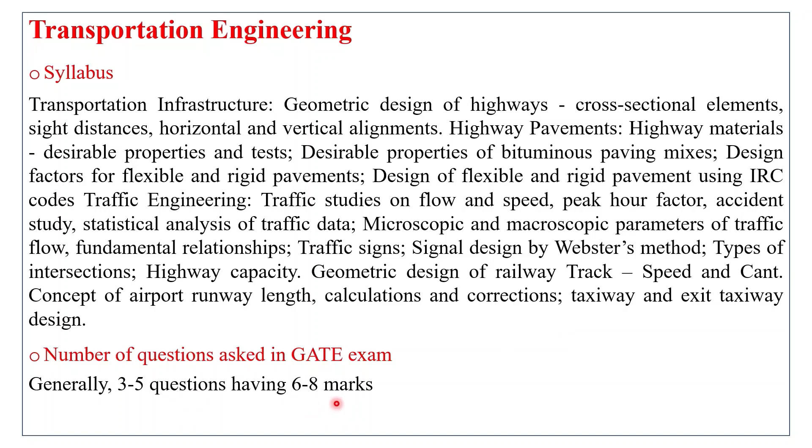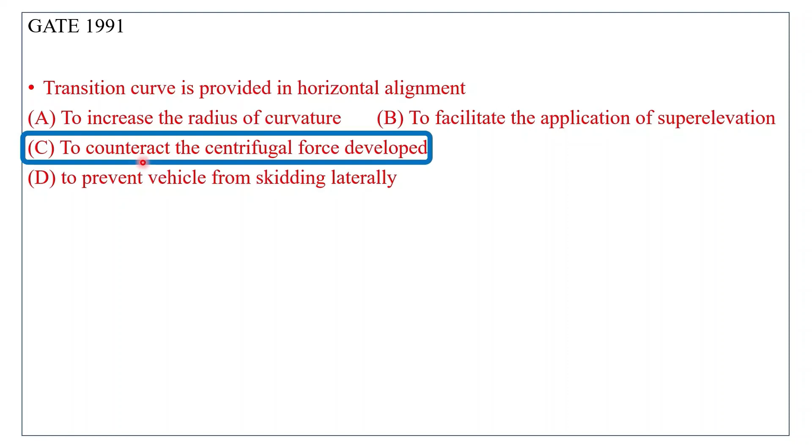चलिए फर्स्ट क्वेश्चन देखते हैं। ट्रांजिशन कर्व इज प्रोवाइडेड इन हॉरिजॉन्टल अलाइनमेंट। आंसर इज टू काउंटरैक्ट द सेंट्रीफ्यूगल फोर्स डेवलप्ड। जो ट्रांजिशन कर्व प्रोवाइड किए जाते हैं किसी भी हॉरिजॉन्टल कर्व के लिए वो सेंट्रीफ्यूगल फोर्स को काउंटरैक्ट करने के लिए प्रोवाइड करते हैं।

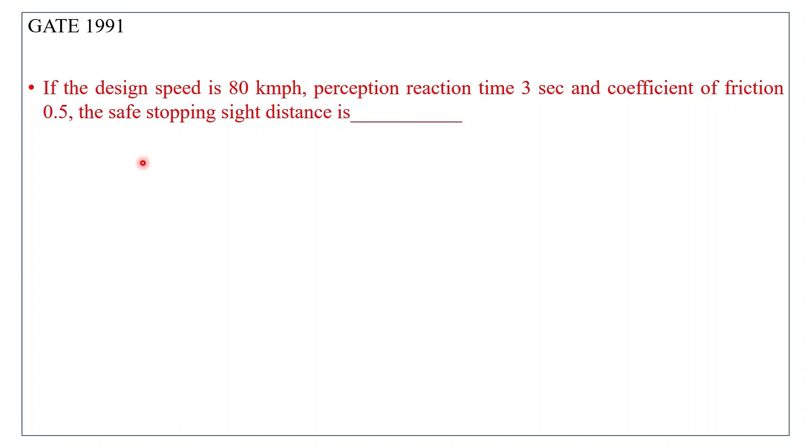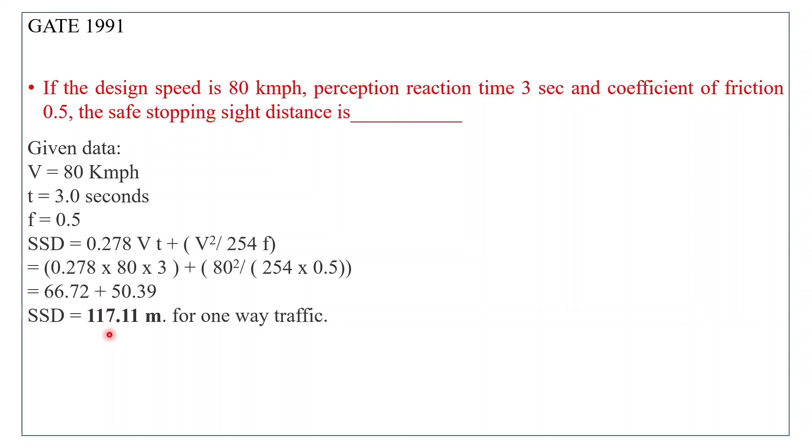नेक्स्ट, इफ द डिजाइन स्पीड ऑफ 80 kmph, परसेप्शन रिएक्शन टाइम 3 seconds एंड कोएफिशिएंट ऑफ फ्रिक्शन इज 0.5, देन सेफ स्टॉपिंग साइट डिस्टेंस इज। स्टॉपिंग साइट डिस्टेंस इज we know 0.278 v into t plus v square by 254 f. So v is given, that is 80 kmph, t is given 3 seconds, f is given 0.5. So when you put all these you will get 117.11 meter for one way traffic.

Next, given the sight distance as 120 meter, the height of the driver's eye as 1.5 meter, the height of the obstacle as 15 cm and the grade difference of the intersecting gradients as 0.09, the required length of the summit parabolic curve is. So we have to calculate the length of the parabolic curve. Every details has been given.

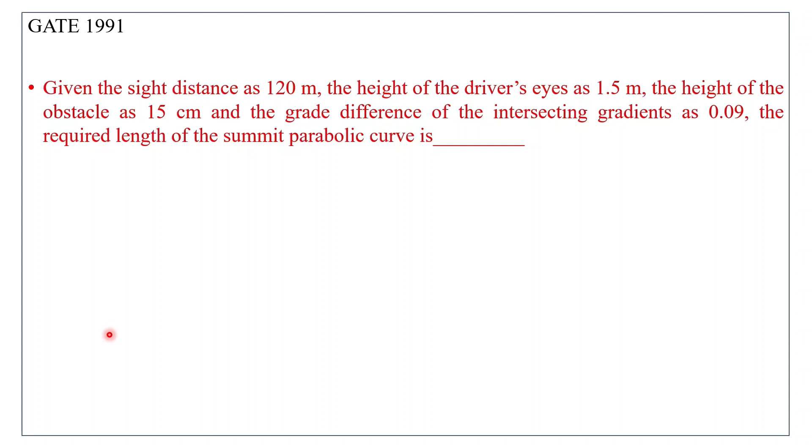So let us consider the length of the summit curve is greater than stopping sight distance. For if this length of summit curve is greater than stopping sight distance, then we have formula for the length of the parabolic curve is ns square by under root 2H plus under root 2h whole square equal to. So n is given is 0.09 into stopping sight distance given 120 meter divided by under root 2 into h. This h is the height of the driver's eye, that is 1.5, and the small h is the height of the obstacle, that is 0.15 meter when you convert it to meter. So it will be 249.36 meters. So it is more than SSD, that is 120 meter. So this is what we have assumed, the length of summit curve is greater than the stopping sight distance. So our assumption is correct. Hence the length of summit curve is 249.36 meter.

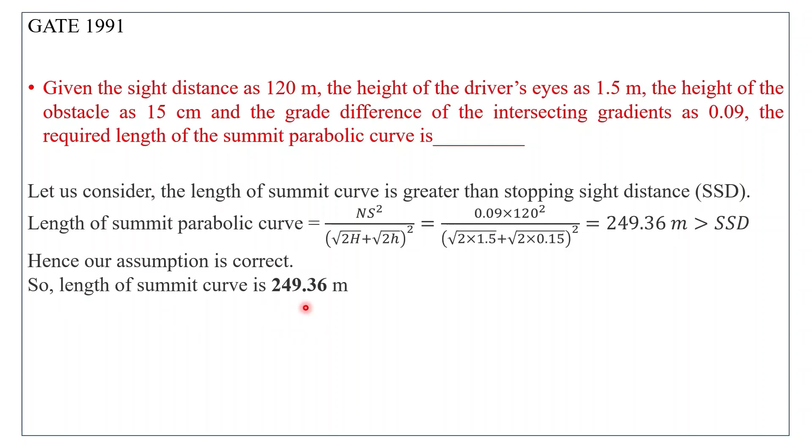Next, moving car observer method is a procedure. So moving car observer method is a procedure to find the traffic flow of traffic stream.

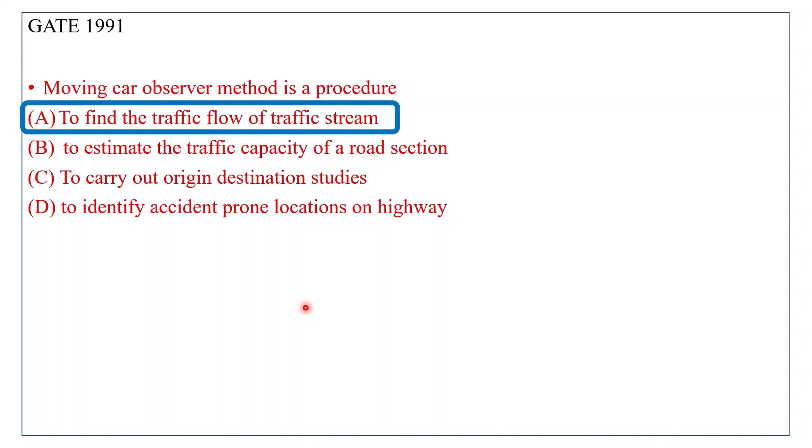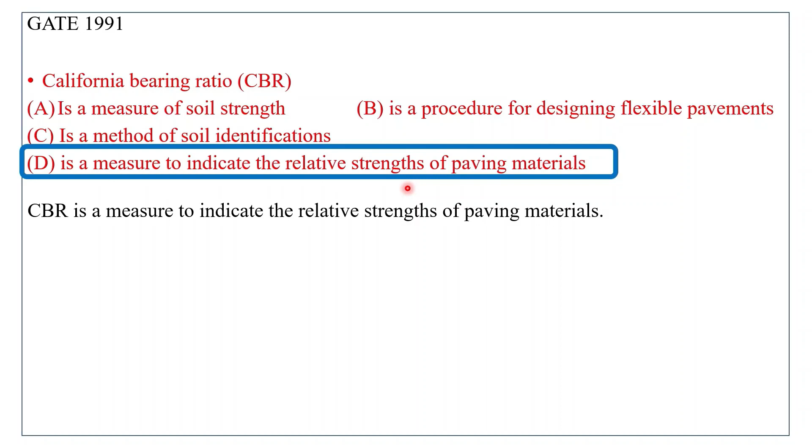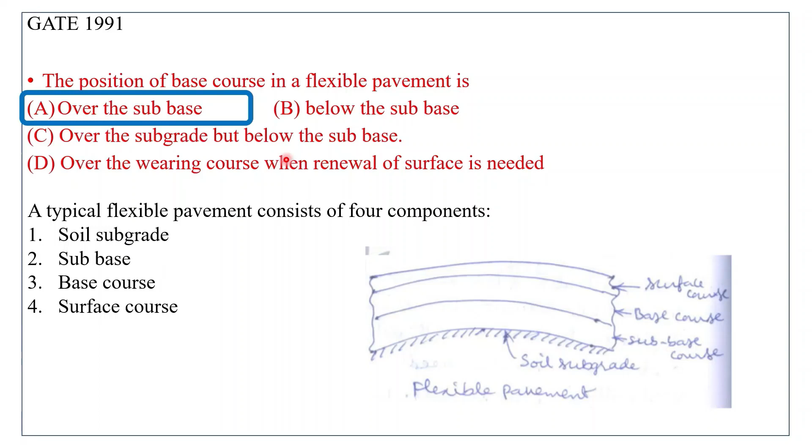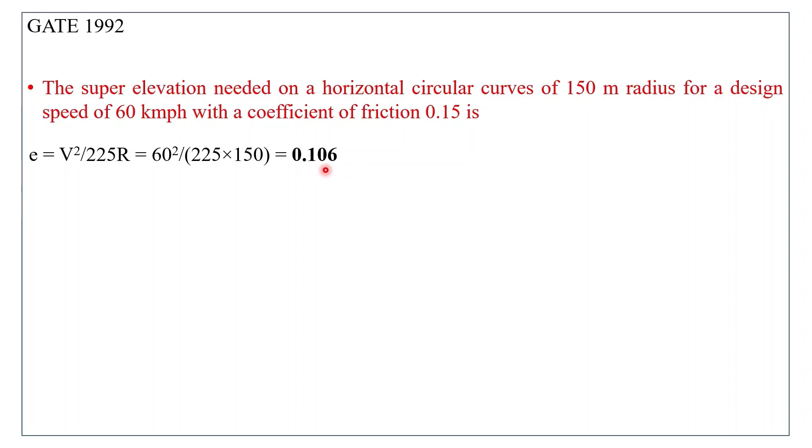Next, the super elevation needed on a horizontal circular curve of 150 meter radius for a design speed of 60 kmph with a coefficient of friction 0.15 is. So you can see that thing is required, that is super elevation needed. See this term, this needed term is very important. So that is E equal to V square by 225 R, we can say that this is the formula. So that is 60 square, V is the 60 kmph square divided by 225 into 150 is the radius. So it will be 0.106 is the answer.

Next, the important factor considered in the design of summit curves on highway is, so it is the sight distance. So in the design of summit curve, sight distance is the important factor.

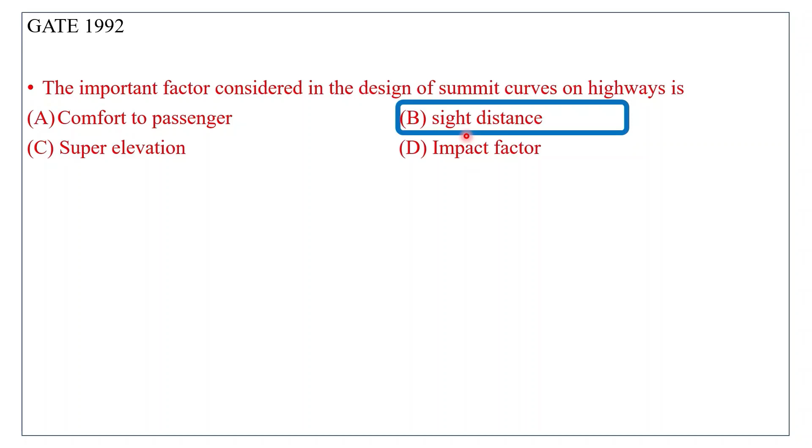Next, desired lines are drawn based on, so it is based on traffic volume studies.

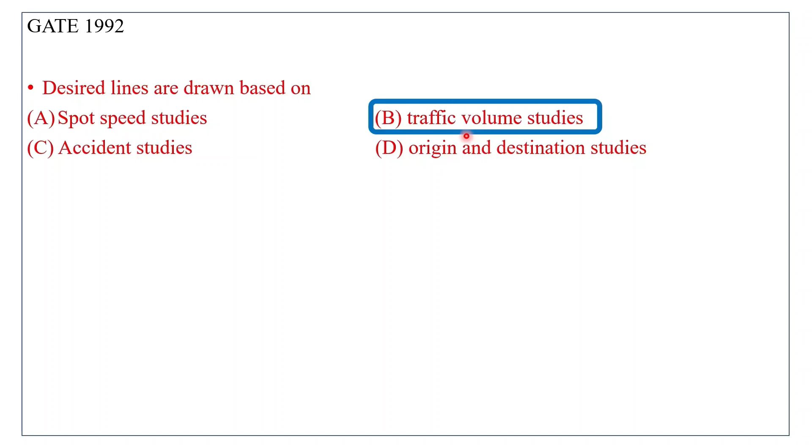Next, the PCU value for the car on an urban road is, so this value will be 1.

Next, the temperature to be maintained for the determination of penetration value of bitumen is 25 degrees Celsius.

Next, the modulus of subgrade reaction is evaluated from the plate bearing test.

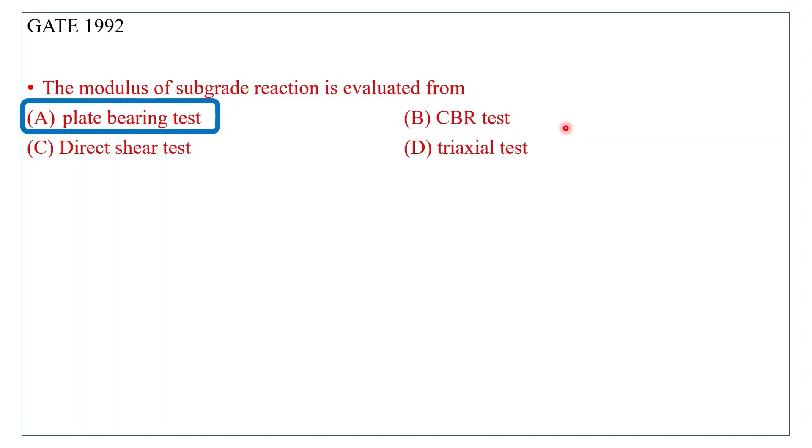Next, the load transfer to lower layers in flexible pavement is by grain to grain contact.

Next, for laying bitumen carpet over waterbound macadam road surface, one has to apply a tack coat.

Next, in a cement concrete pavement, dowel bars are used in expansion joints.

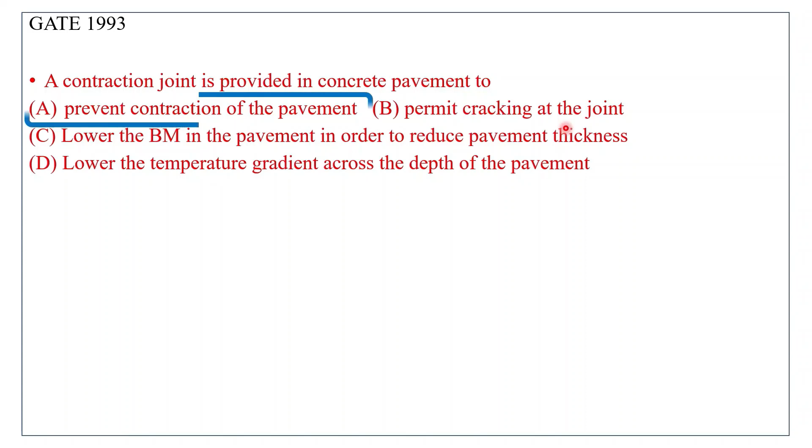Next, a contraction joint is provided in concrete pavement to prevent contraction of the pavement.

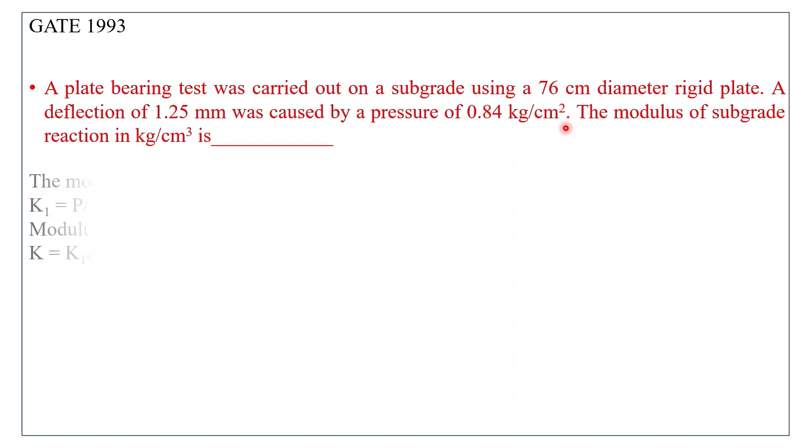Next, a plate bearing test was carried out on a subgrade using a 76 cm diameter rigid plate. A deflection of 1.25 mm was caused by a pressure of 0.84 kg per centimeter square. The modulus of subgrade reaction in kg per centimeter cube: we know K1 equals P by delta. P is the given pressure, 0.84, divided by delta, given as 1.25 mm. So K1 equals 6.72 kg per centimeter cube for the 76 centimeter diameter rigid plate. Now, what will the modulus of subgrade reaction be for the standard plate of 75 centimeters? Since you've calculated this value for 76 centimeters, using interpolation you can calculate it for 75 centimeters. So K equals K1 times A1, that is 6.72 into 76 by 75, giving you for the radius of 75 centimeters a value of 6.81 kg per centimeter cube.

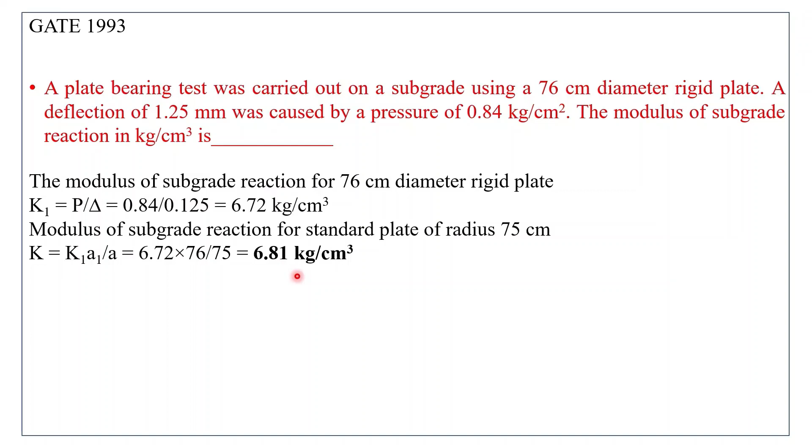Next, a road is passing through a hilly area with a horizontal curve. If the super elevation provided is 1 in 10 and the coefficient of lateral friction is 0.16, find the minimum radius of the horizontal curve which vehicles can negotiate safely at a speed of 40 kmph in meters. So E is given as super elevation 1 in 10, that is 0.1, F is given 0.16, V is 40 kmph. We know the super elevation formula: E plus F equals V square by 127 R. Using this equation we calculate R, so R equals 48.45 meters.

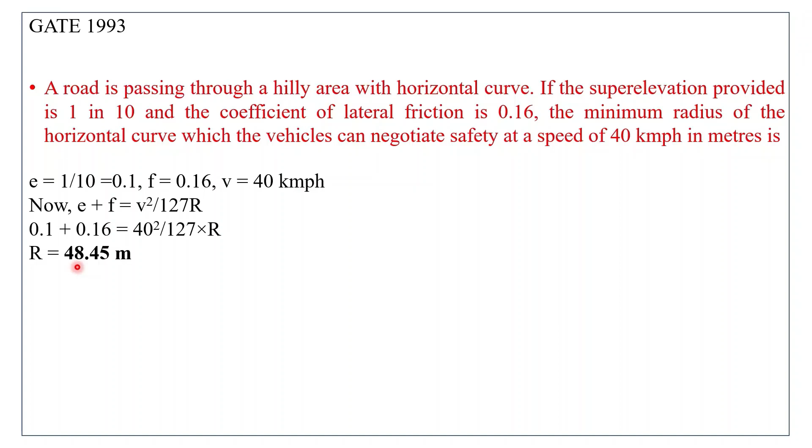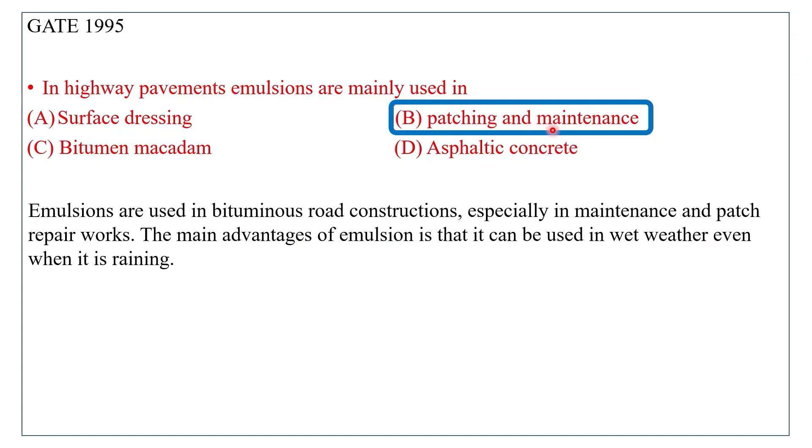Next, in highway pavements, emulsions are mainly used in patching and maintenance work. For patching and maintenance work, we use emulsions in bitumen road construction. The main advantage of emulsion is that it can be used in wet weather also, even when it is raining, in the maintenance of bituminous roads.

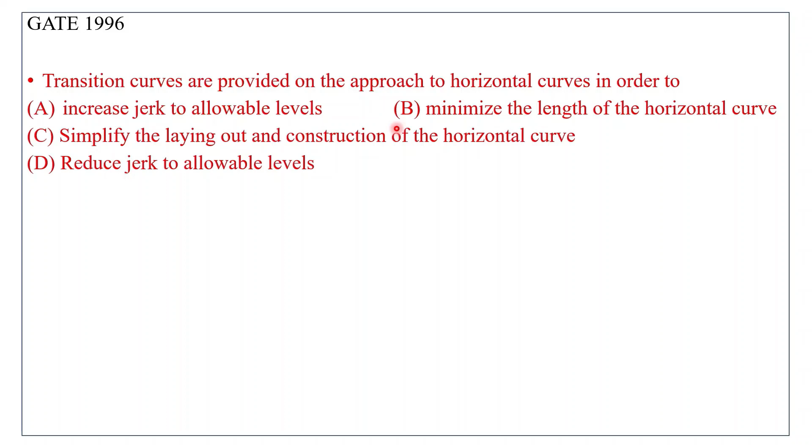Next, transition curves are provided on the approach to horizontal curves in order to reduce jerk to allowable levels.

Next, flexible pavements derive stability primarily from aggregate interlock, particle friction and cohesion.

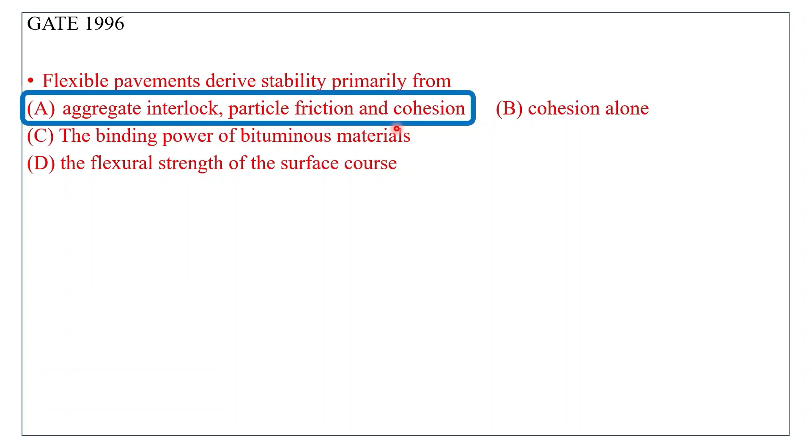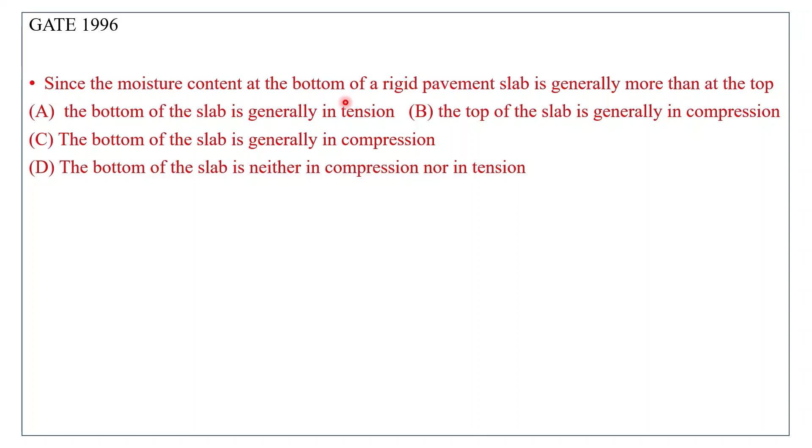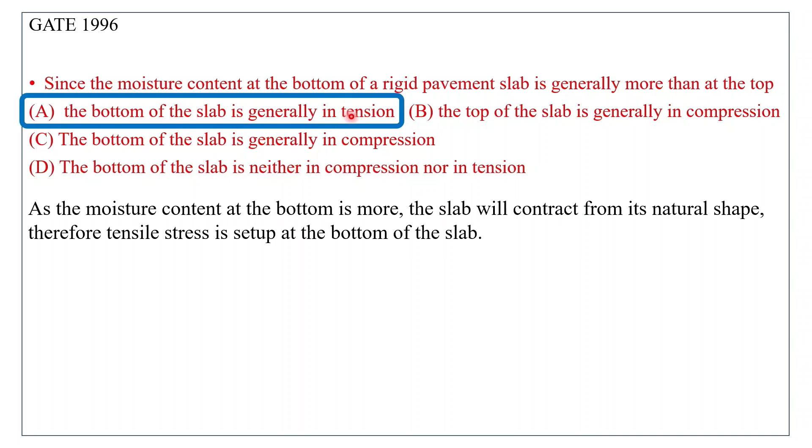Next, since the moisture content at the bottom of the rigid pavement slab is generally more than at the top, which condition will occur? The bottom of the slab is generally in tension.

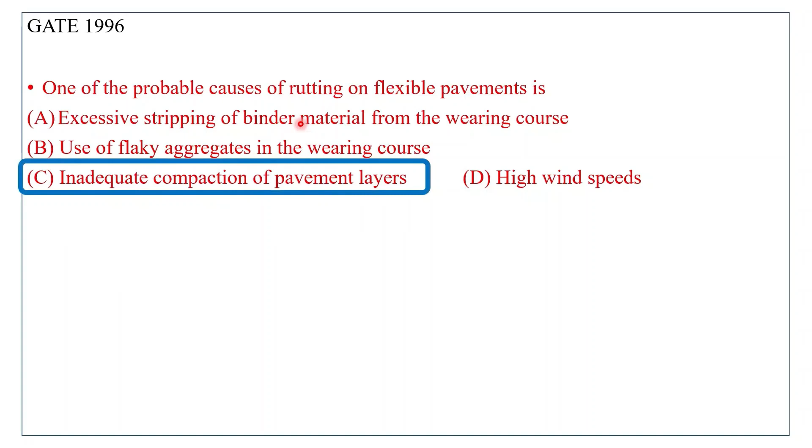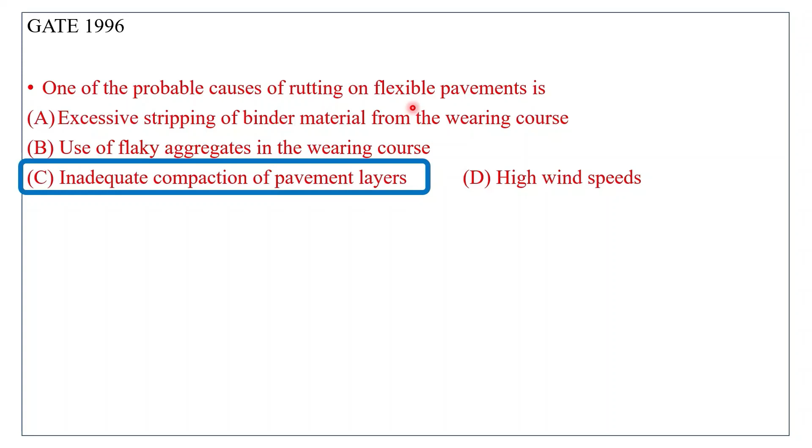Next, one of the probable causes of rutting on flexible pavement is inadequate compaction of the pavement layer. If there is less compaction of the pavement layer, it causes rutting on flexible pavement. Next, the following general statements may be made about the penetration value and softening point of bitumen.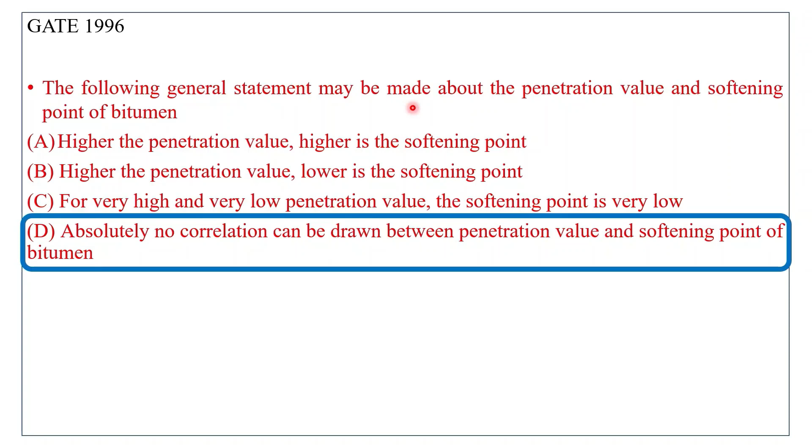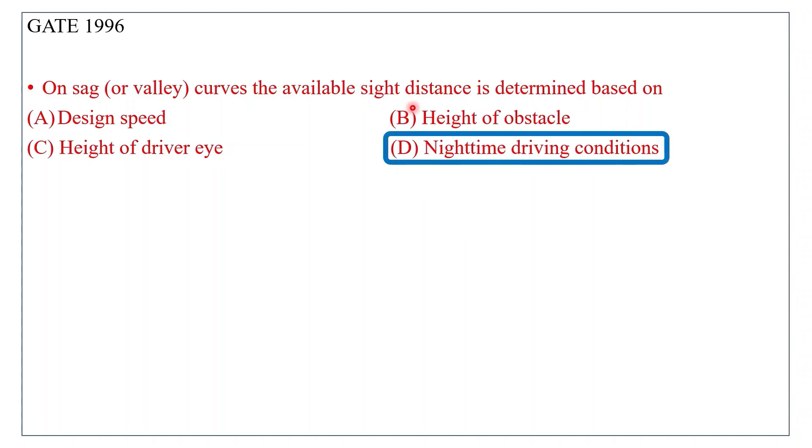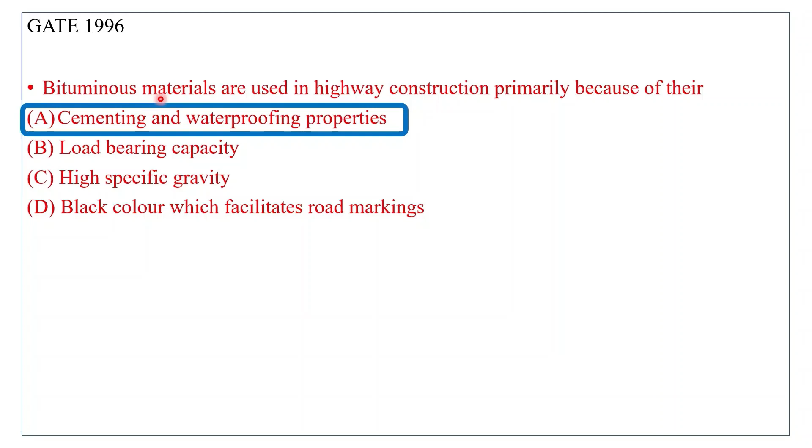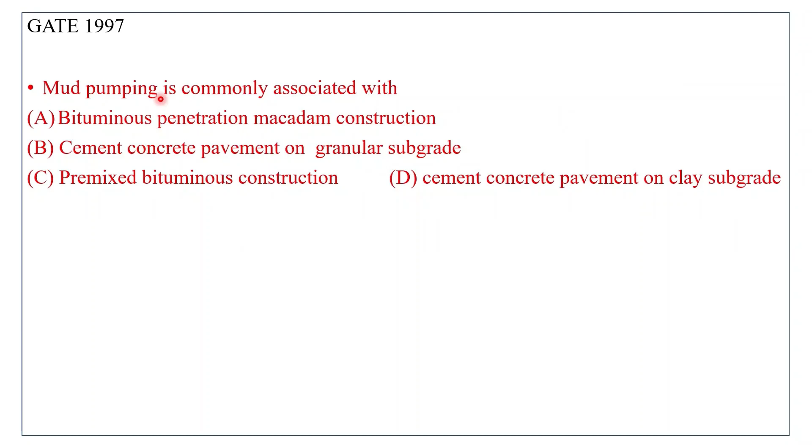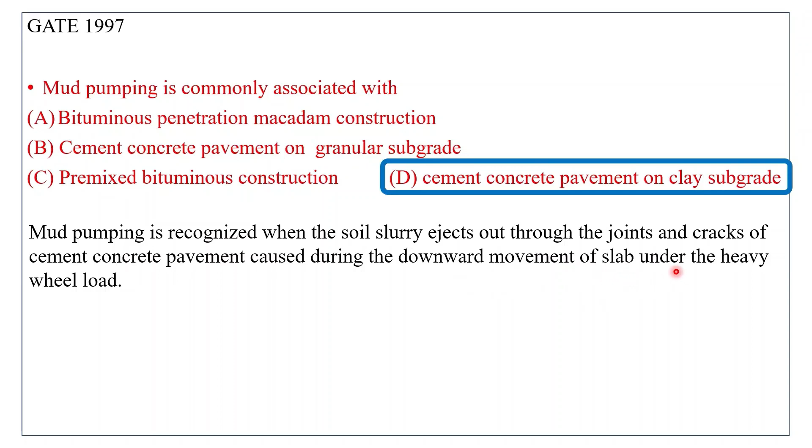Mud pumping is commonly associated with cement concrete pavement on clay subgrade. Mud pumping is recognized when soil slurry ejects out through the joints and cracks of cement concrete pavement, caused by the downward movement of the slab under heavy wheel load.

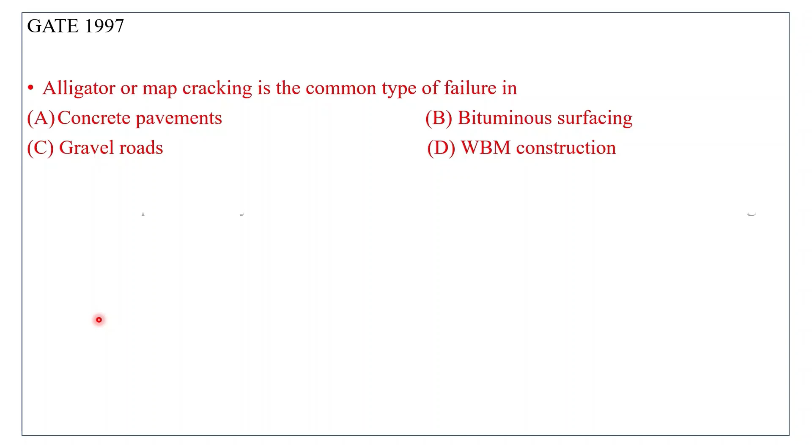Alligator or map cracking is a common type of failure in which type of road? The answer is bituminous surfacing. This is the most common failure in bituminous surfacing.

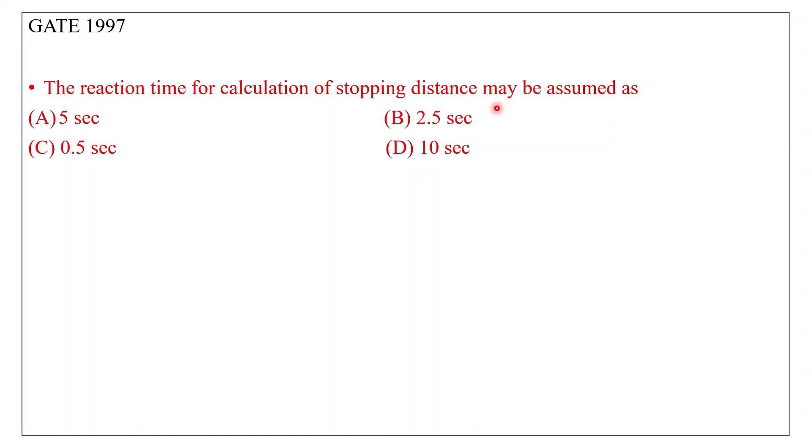The reaction time for calculation of stopping distance may be assumed as 2.5 seconds.

The superelevation needed for a vehicle traveling at 60 kmph on a curve of radius 128 meters, with a coefficient of friction of 0.15, is calculated using E plus F equals V square by 127 R. F is 0.15, V is 60, and R is 128. So E equals 0.071. The answer is 0.071.

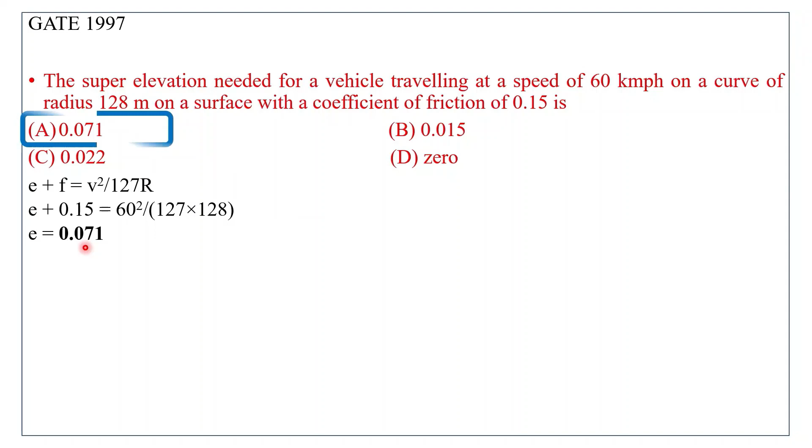If an ascending gradient of 1 in 50 meets another ascending gradient of 1 in 30, the deviation angle is calculated as 1/n equals 1/50 minus 1/30, since both are ascending gradients, both signs are plus. So 1/50 minus 1/30 equals 1/75. The correct answer is B, 1/75.

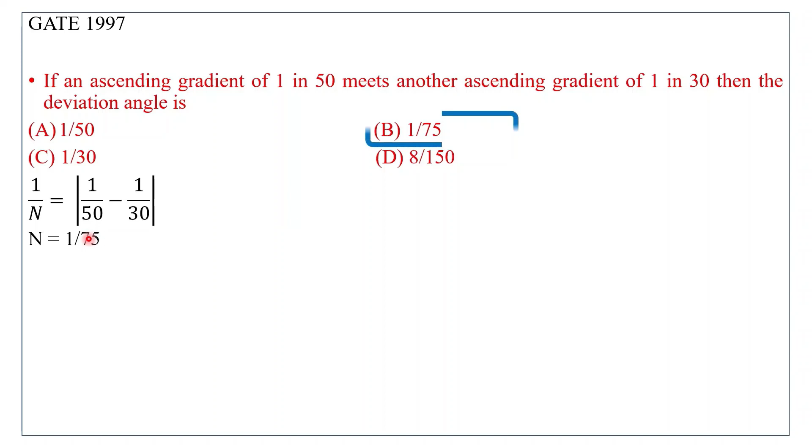The penetration test for bitumen is conducted at a temperature of 25 degrees centigrade. This test measures the hardness or softness of bitumen by measuring the depth of penetration of a standard loaded needle in 5 seconds while maintaining the bitumen sample temperature at 25 degrees Celsius. The correct option is C, 25 degrees Celsius.

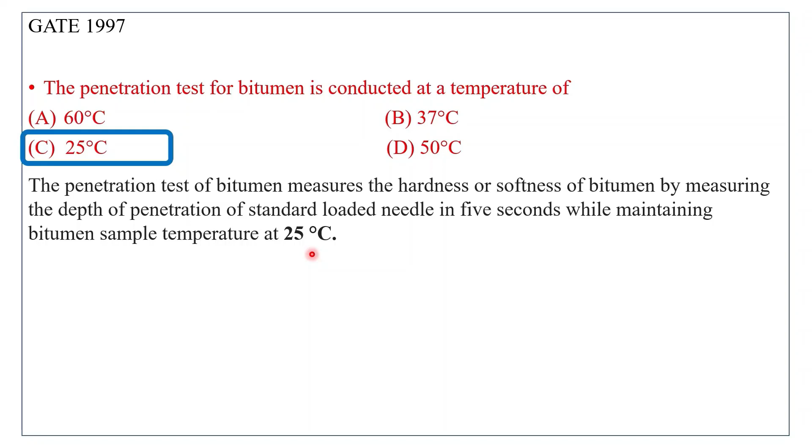The group index of soil subgrade is 7. The subgrade soil is rated based on: 0 to 1 is good, 2 to 4 is fair, 5 to 9 is poor, and 10 to 20 is very poor. So 7 falls in the poor category. The answer is A, poor.

The unit of coefficient of subgrade modulus is kilonewton per meter cube.

The total thickness of pavement by the CBR method depends on the CBR value of the subgrade.

The width of expansion joint gap is 2.5 cm in a cement concrete pavement. The spacing between expansion joints for a maximum rise in temperature of 25 degrees Celsius is to be found, given a thermal expansion coefficient of 10 x 10^-6 per degree Celsius. We know delta 1 is 2.5 cm, so the width of expansion gap per pavement is 2.5 by 2, which is 1.25 cm or 0.0125 m. Temperature difference is 25 degrees centigrade, and alpha is 10 x 10^-6 per degree centigrade. Using delta equals L alpha delta T, spacing of expansion joint L equals delta 1 divided by alpha times T2 minus T1. Substituting values: 0.0125 divided by (10 x 10^-6 x 25). The answer comes out to 50 meters.

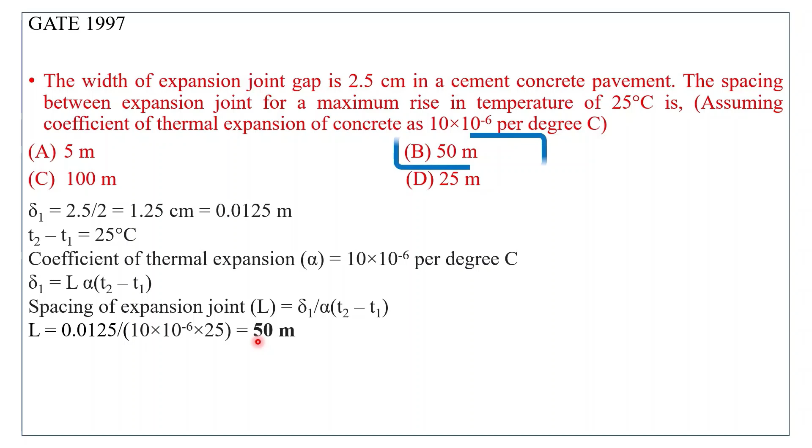The modulus of subgrade reaction is obtained from the plate bearing test in the form of a load deformation curve. The pressure corresponding to the following settlement value should be used for computing the modulus of subgrade reaction. The modulus of subgrade reaction K is proportional to the displacement. This displacement level delta is taken as 0.125 cm in calculating K. As we know, K equal to P by delta, so P by 0.125 kg per centimeter cube. So the answer will be C, 0.125 centimeter.

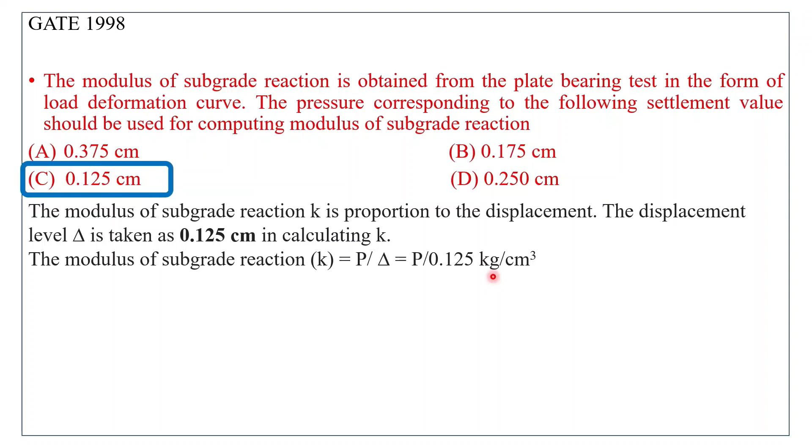Next, in a plate bearing test, if the load applied is in the form of an inflated type of wheel, then this mechanism corresponds to a flexible plate. Answer will be B.

Next, base course is used in rigid pavements for prevention of pumping.

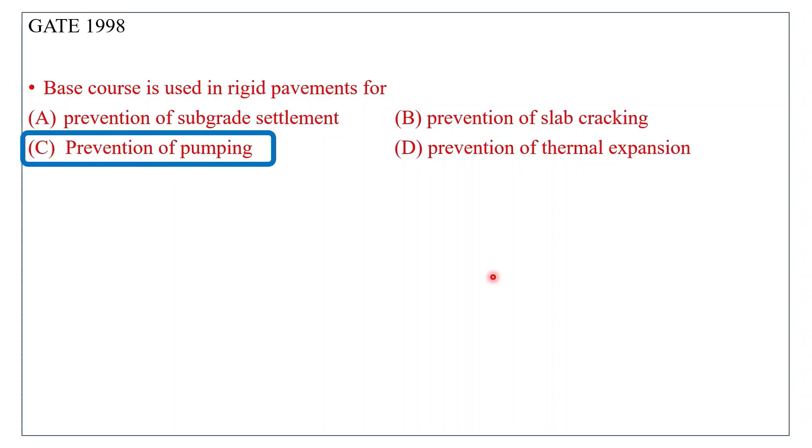Next, a plate bearing test with 20 cm diameter plate on soil subgrade yielded a pressure of 1.25 into 10 power 5 Newton per meter square at 0.5 cm deflection. What is the elastic modulus of subgrade?

So we will calculate. Delta is equal to 1.18 PA by E, where A is the radius of the plate. Diameter is given as 20 cm, so 20 by 2 equal to 0.1 meter. Put all the data into this equation: delta is 0.05 equal to 1.18 P, where P is 1.25 into 10 power 5, and A is 0.1, divided by E. So you will get the elastic modulus of subgrade E equal to 29.50 into 10 to the power 5 Newton per meter square.

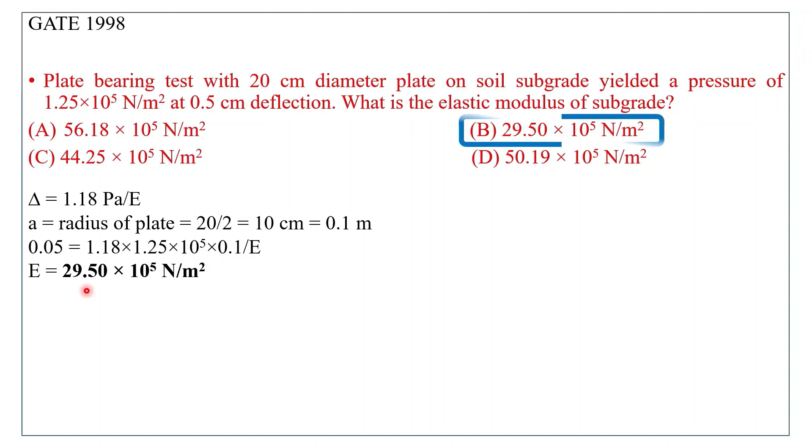Next, rapid curing cutback bitumen is produced by blending bitumen with petrol.

Next, a parabolic curve is used to connect a 4% upgrade with a 2% downgrade as shown in the figure. This slope is 4% and this slope is 2% minus, given as a downgrade.

The highest point on the summit curve is at a distance measured horizontally from the first tangent point. So measure from this point where the top point will arrive. You can calculate this using a simple triangle also. When you provide the slope on this side, and plot a line from this, you can calculate by using the simple triangle. So the answer will be 100 meters from this point.

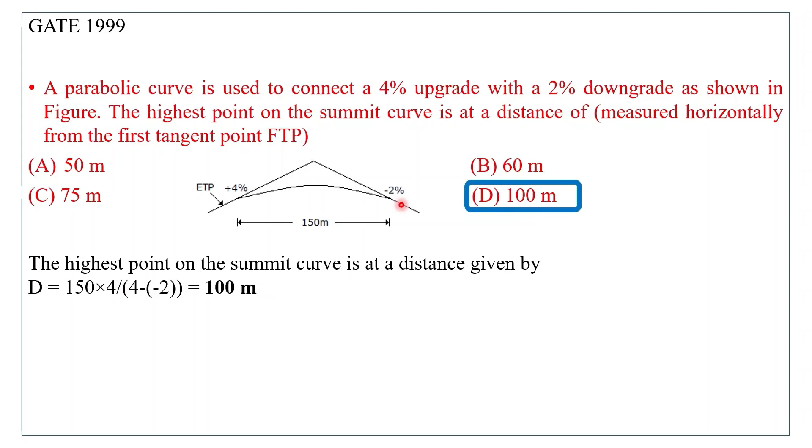Next, width of carriageway for a single lane is recommended to be 3.75 meter.

Next, bituminous materials are commonly used in highway construction because of their binding and waterproofing properties.

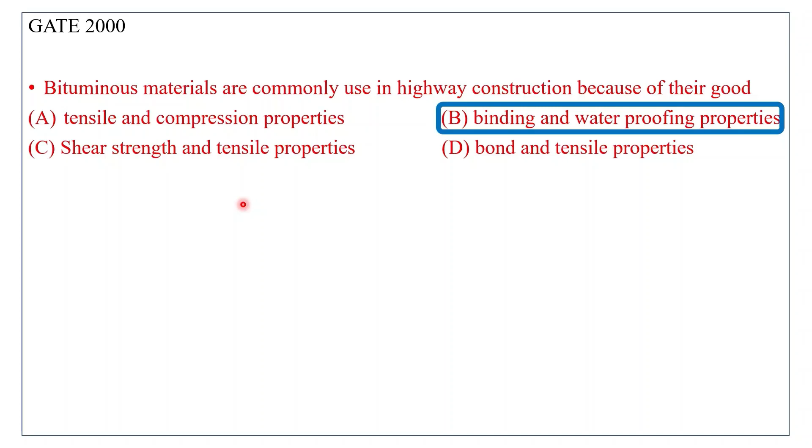The standard plate size in a plate bearing test for finding modulus of subgrade reaction K value will be 75 cm. We have seen this in the previous questions also.

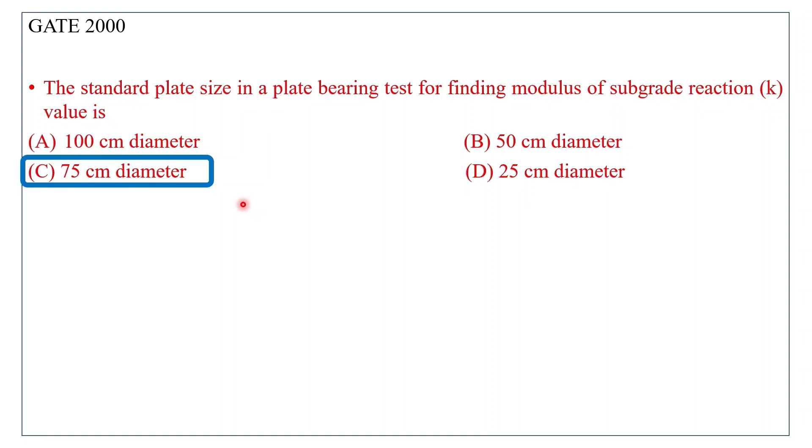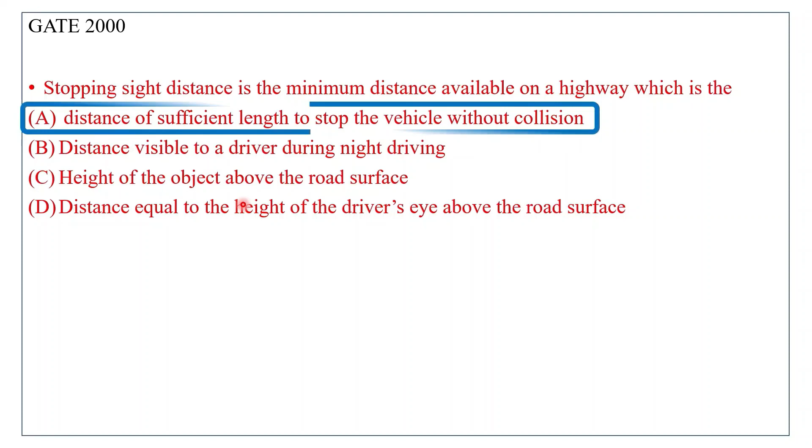Stopping sight distance is the minimum distance available on a highway, which is the distance of sufficient length to stop the vehicle without collision.

The ruling minimum radius of horizontal curve of a NH in plain terrain for a ruling design speed of 100 kmph with E equal to 0.07 and F equal to 0.15 is close to. We have to calculate the radius of the curve. Every data is given, so when you apply the equation of superelevation, E plus F equal to V square by 127R. By using that, you will calculate the R value as 358 meter, equivalent to 360 meter. So the answer will be B.

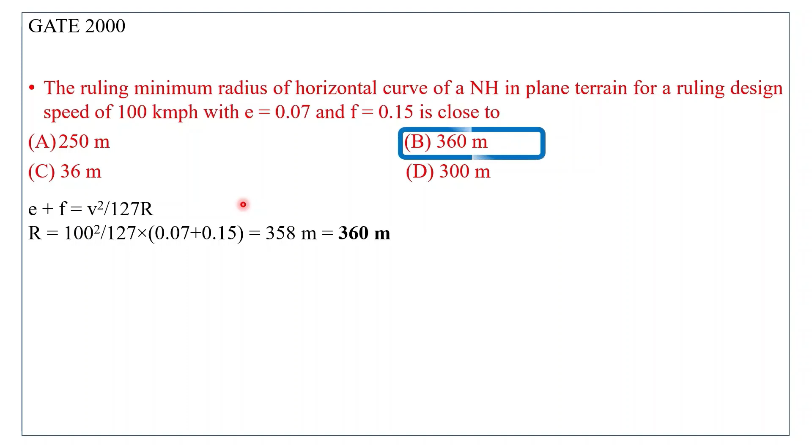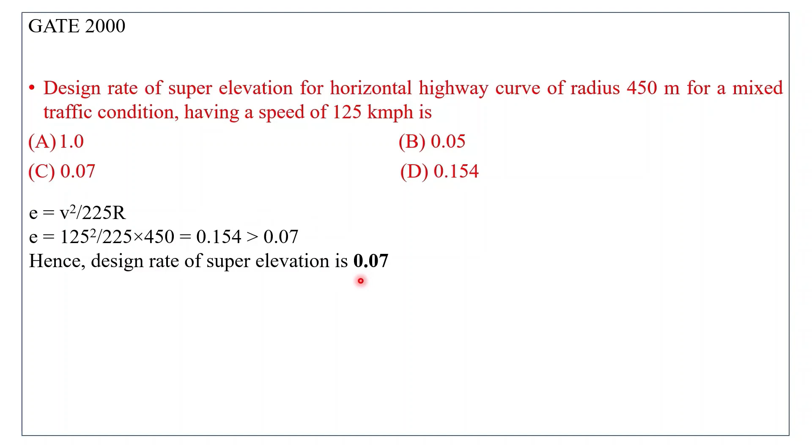Next question: design rate of superelevation for a horizontal highway curve of radius 450 meter for a mixed traffic condition having a speed of 125 kmph is. We have to calculate the design rate of superelevation. As we know, E equal to V square by 225R. So it will equal 125 square divided by 225 into R, which is 450, giving 0.154. What is the maximum limit? The maximum limit of superelevation is 0.07. So we will provide 0.07. Correct option will be C, 0.07.